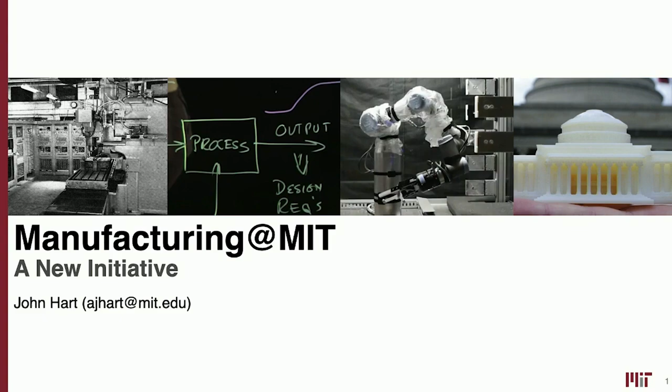I will describe to you the vision for a new initiative at MIT called Manufacturing at MIT, whose goal is to build new campus-wide programming related to advanced manufacturing, engage with industry, engage with faculty and students, and help chart a vision for a future of production that I feel is really unique and special to what MIT can offer. I have four main topics in my remarks.

The first is some context, my personal perspective on where manufacturing has been and where it is going. Second, something about the history of manufacturing at MIT and how we got to this date. Third, some details of our efforts to build manufacturing at MIT. And fourth, a brief summary of an industry consortium that we are just getting off the ground and welcoming a final set of inaugural members before we launch in the springtime of next year.

You're here because you have interest in manufacturing, and I'm here because I love how manufacturing drives so many aspects of our daily lives, from raw materials to the most sophisticated finished products. Wherever you are, you can look around the room and look at the clothes you're wearing and the devices you're holding and realize how many things have been in factories and how manufacturing matters to so many aspects of our world and the future of our world.

As you also likely know, manufacturing has shaped the course of history. There was a time, hundreds of years ago, when single innovations changed the quality of human life, such as Gutenberg's printing press in the 1400s, and the invention of the Bessemer Siemens process for open hearth manufacturing of steel, which was a key starter of the Industrial Revolution.

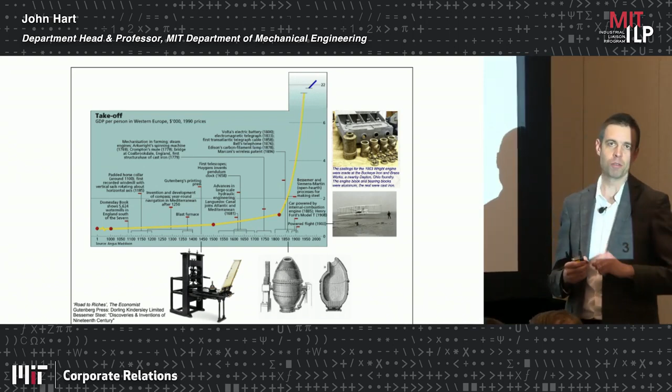Now, perhaps we're at a time when there's not going to be one such singular innovation that changes the future of production, but I also feel that there hasn't been a fundamental innovation in manufacturing in the past 100 years. Arguably, the most recent fundamental change was mass production, the Ford Motor Company's production system in around 1920, which led to the launch of the automotive industry.

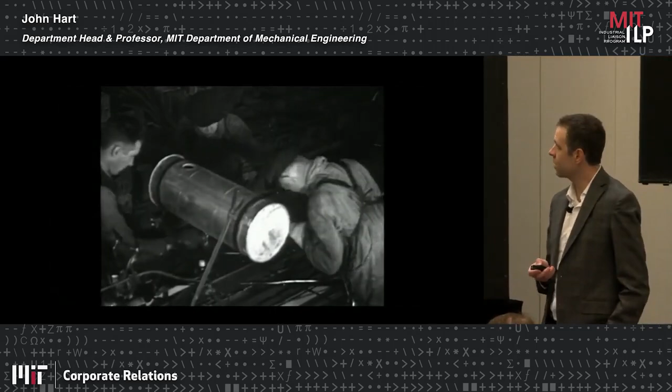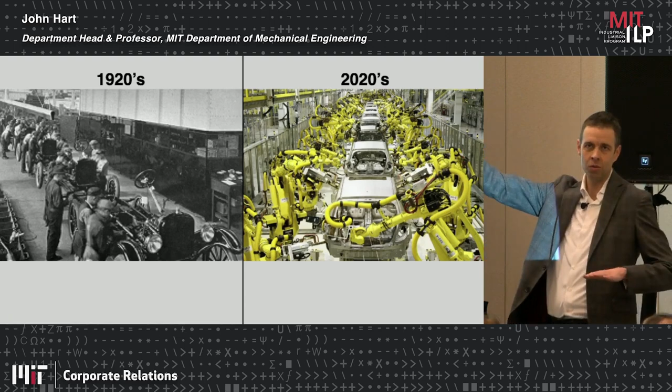If you look at some metrics, bear with my approximation here, between an automotive factory of the 1920s and a sophisticated production line now, you realize that while technology has advanced by orders of magnitude, and cars as a proxy for sophisticated systems are also much better and they're electrifying and changing, there's really been no change in the architecture of products and their connection to the complexity of the manufacturing process. Cars today versus 100 years ago have 10 times the number of parts, take 10 times the amount of time to come off the production line, and cost, on average, 10 times as much in adjusted dollars.

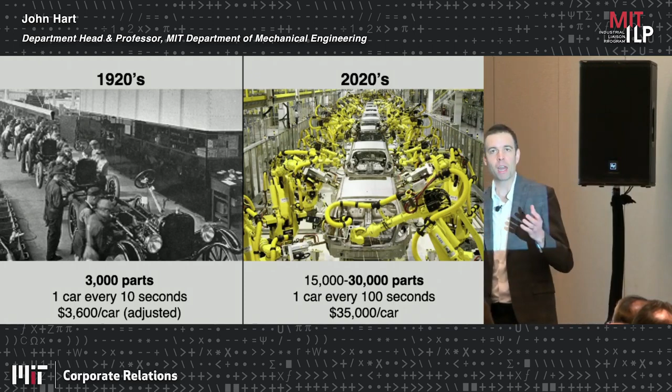So why hasn't this changed? Well, I feel it hasn't changed because there have been no technology advances that have inserted effectively on the system level into both production systems and to the front-end design of new products. And this crisis of complexity, as I call it, managing more sophisticated product designs, coordinating supply chains both nationally and globally, is reflected in many other products.

And as we hear a lot about these days, the future of manufacturing is also coupled with the world's greatest challenges, addressing economic inequality, combating climate change, and with an important attention toward national security. And...

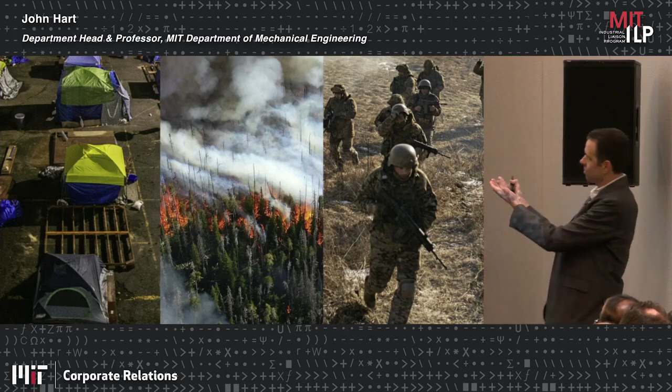This is a bit of a slide of despair, right? Concern. But I'm really here because I feel there's a lot of hope and there's a lot of opportunity. That the time to rethink manufacturing and reinvest our intellectual and personal capital in a new definition of manufacturing is now.

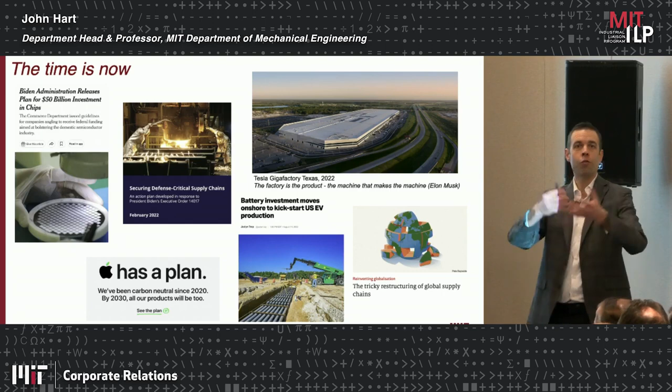I know you're from companies around the world, and this slide has a sort of more US focus, but I believe these trends are quite universal. You have governments around the world making new and big investments in advanced manufacturing, and you have the interest of the public and the private sector, industry and the investment community, believing in the importance of manufacturing for the reasons I described and more.

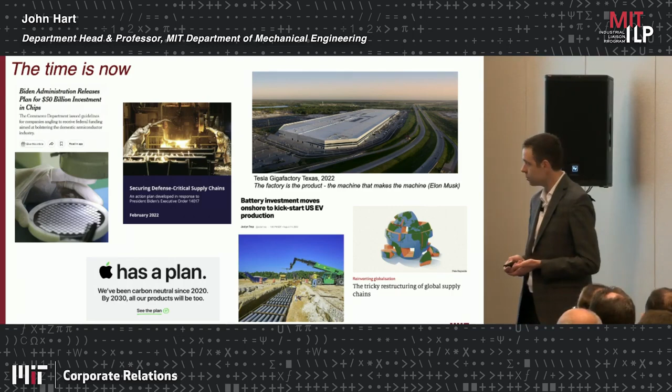For the past couple of years, I've been leading an effort with colleagues to look at the history of manufacturing across MIT and chart a course for the future. An interesting tidbit connected to the ILP is that the launch of formal, organized manufacturing research and industry engagement at MIT was about 40 years ago. The inaugural symposium of the Laboratory for Manufacturing and Productivity, which I direct, happened in 1978, co-hosted at Kresge Auditorium with the good old ILP.

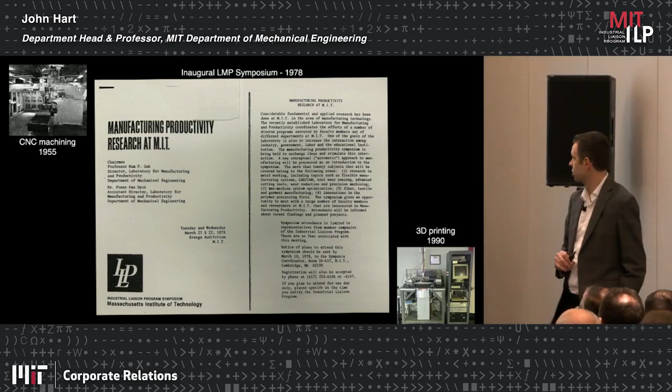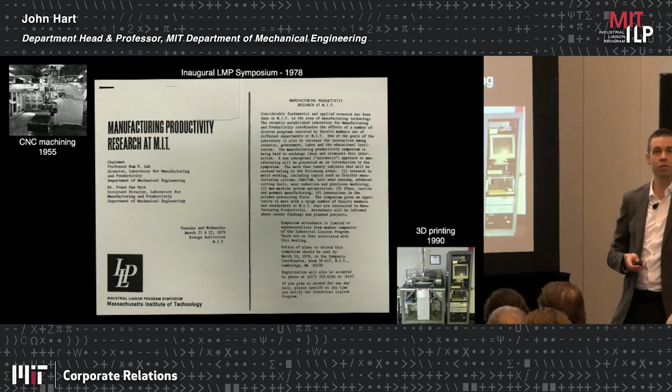You may also know that at MIT we built some of the first CNC machines that transformed aerospace and defense production, and we had some of the world's first 3D printers built by Professor Ely Sachs and colleagues. But what I didn't realize when I came to MIT as faculty 10 years ago is that alongside the technology arc, there's also been an amazing arc of research in not only production systems, but the social sciences and the organizational structures that drive and transform manufacturing globally.

These include seminal studies like Made in America, The Machine That Changed the World, that unveiled the principle of lean production, and more recently, the Production in the Innovation Economy and the Work of the Future studies.

So one takeaway of why I feel MIT can play a big part in this new manufacturing is our symbiosis between the technology and the social sciences and how that leads to change outside of campus and in the real world. I believe one measure of this, in addition to the many exciting technology areas—robotics, materials, AI, you name it—are the new companies that have been founded in the Boston area and worldwide by MIT alums with interest in manufacturing.

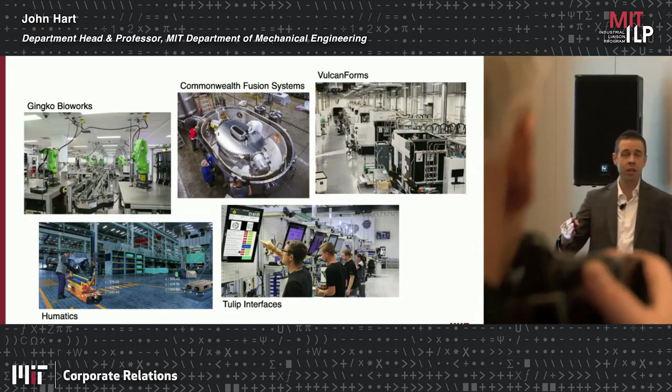These include companies doing biomanufacturing, accelerating the process to develop new pharmaceuticals and bio-derived products, factory-scale additive and digital manufacturing technologies, fusion and other clean energy technologies, and the factory floor and supervisory level tools that are needed to make supply chains and factories more digital, more automated.

And we have a really special connection between this interest in entrepreneurship, our ways of engaging with industry, and what our faculty and students do best, which is learn and do in the classroom and in the lab.

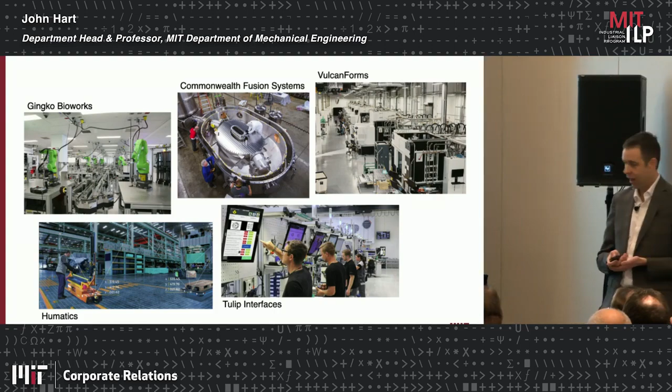So manufacturing at MIT is a vision for a campus-wide effort to establish new programs and partnerships that will help shape the future of production for innovation, growth, equity, and sustainability.

Over this past two years, we've been looking at where manufacturing is at MIT now and how we can start to build a stronger community that really exposes manufacturing as a fabric across technical, social, and management science disciplines. So here I'll tell you about a few things that we are doing, and then I'll talk about the future, where we're headed, and how we hope to engage some of you and your organizations along the way with us.

So first, we've started a series of very high-profile events, a distinguished speaker series hosting CEOs and government leaders from around the world, and we've also held an annual symposium every springtime that brings together folks at MIT with external partners and industry collaborators to talk about the future of manufacturing, from policy to technology to sustainability.

Second, we've taken a look at our curriculum in manufacturing and realized that we have a broad group of faculty across departments, including in my own department, mechanical engineering, that are teaching advanced manufacturing in a way that really reflects MIT's ethos, the combination of mind and hand.

For instance, in our largest manufacturing class in mechanical engineering, we flipped the classroom. We created video lecture materials that the students watch ahead of time, and then in class, instead of watching a professor like myself point at the slides, the students do a hands-on activity and ask questions to one another and with the teaching staff.

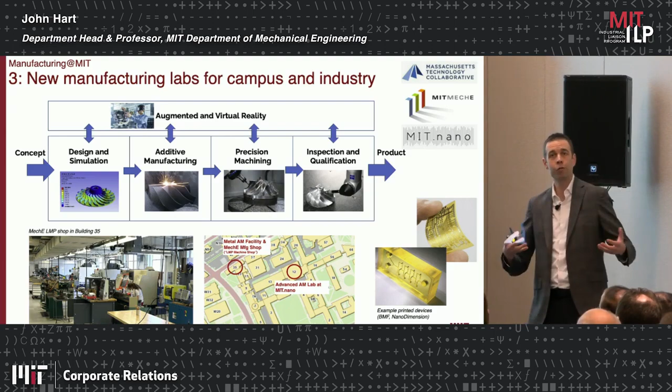And we hope there are more facilities as we build our programs in different and complementary domains in the future. And fourth,

Perhaps something that faculty are most excited about is a new large-scale research project to envision what we are calling this new manufacturing. It's a vague term, but we're laying out a series of questions: if we look at the technologies emerging in different domains—automation, AI, robotics, the ability to accelerate sustainability and new materials—along with different industry domains, how can technologies be deployed faster? How can policy and investment instruments be informed?

And what will the structure of firms look like in the future? Will there be more vertically integrated companies? Will there be fewer large companies and more small and medium businesses? And how will the overall connectivity change going forward?

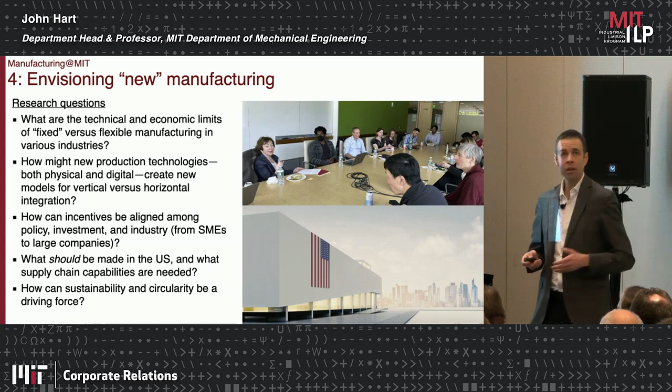And we have a global focus and want to work around the world, but we also have a particular focus on the United States in this project as a kind of laboratory for thinking about how this new manufacturing can emerge. And we think about the world's most famous manufacturing companies of the past 50 and 100 years, such as TSMC, which arguably dominates semiconductor production globally and introduced the foundry model to semiconductor production.

And we want to work closely with these companies and understand strategy, and understand how the things we do best at MIT relate, and also understand the beautiful small and medium enterprises that represent this special sauce that makes manufacturing excel.

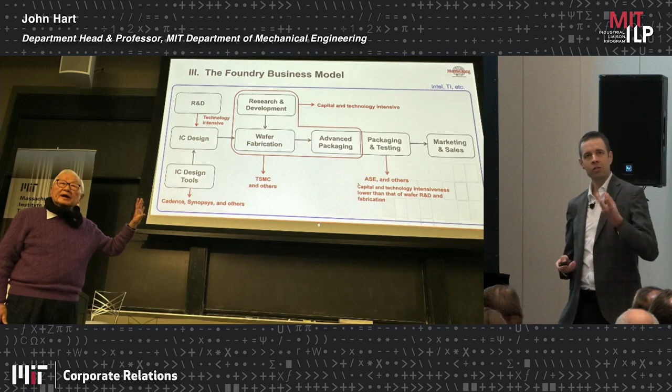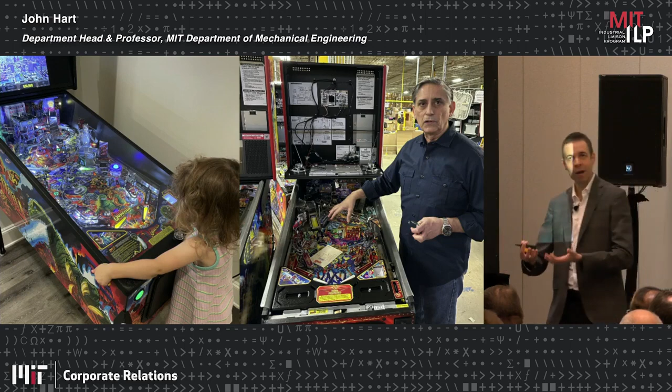They have 600 employees, and they do the full stack from design and licensing all the way to shipping sophisticated electromechanical products. And how do we encode the DNA of advanced design and manufacturing like this? And how do we reflect that on how we work with industry and how we do research that can lead to new technologies and more efficient production systems going forward?

And there's also many, many startups, such as VulcanForms, which is building the world's largest additive manufacturing production facility just an hour west from here in Devens, Massachusetts.

So putting all of these pieces together, what is manufacturing at MIT? I said it is a campus-wide effort to establish new partnerships and programs in these areas. And here's a perhaps too busy diagram of what it looks like to us at present.

So consider a new initiative at MIT that stitches together manufacturing from across campus, works closely with the existing departments, labs, and centers that excel in the technical areas—aviation and space manufacturing, semiconductors, rethinking the built environment, bio and chemical manufacturing, and you name it.

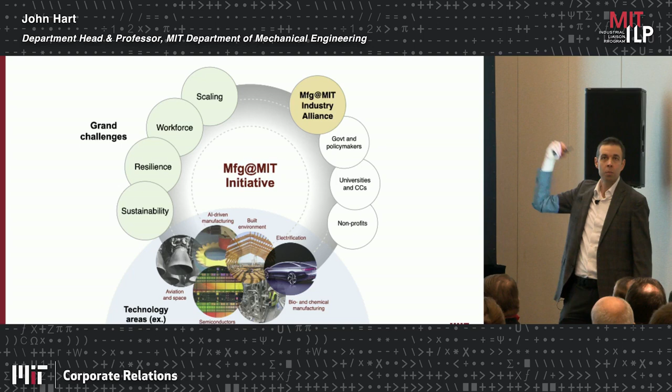It lays out a series of grand challenges, just overarching themes that touch all technical domains arguably, such as scaling new technologies and companies, building a stronger workforce, enhancing the resilience of our supply chains, and becoming more sustainable and circular in manufacturing.

And then it builds strong partnerships with industry through an industry alliance that I will describe, but also with government and policymakers, with other universities and community colleges and vocational schools that play a really important role in rebuilding our manufacturing workforce. And I mean those kinds of organizations, not just in the US, but also in other economies and emerging manufacturing economies.

And the initiative will set up these programs and affiliations and build new activities, seed early stage research through the alliance that I will describe, help work with companies to define collaborative technology roadmaps, hold events and workshops both broad and specific, catalyze entrepreneurship, introduce small companies to large, develop new educational programs for on campus and for the world, and build and operate new laboratories that our students and researchers will use, and that will also be available to industry to get access to advanced equipment and build prototypes.

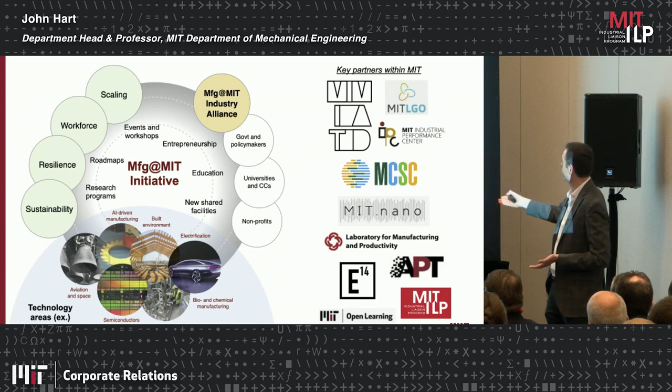And we will have many partners across MIT. As ILP members, you're familiar with MIT as this hodgepodge of logos and acronyms, and it's not that manufacturing sits in a silo. We work with the Morningside Academy of Design, with the Climate and Sustainability Consortium, and with venture capital firms and other degree programs around campus.

So now let me tell you, as I wrap up and hopefully have time for questions, about our industry alliance. And first of all, I'm not here to give you a sales pitch, I just want to tell you what we're doing. We really appreciate that you're members of ILP, and should you be really interested in manufacturing, we hope this is an opportunity for further conversation to understand your needs and your interest.

The Manufacturing Industry Alliance, or Industry Consortium, will be a platform whereby we engage with leading global manufacturing companies and allow our members to engage with one another through advanced research, education and training, collaborative strategy, and through seeding and adopting technology via entrepreneurship.

Here's a somewhat busy diagram of what engagement and membership in the Alliance will look like. We're in the process of recruiting founding members and plan to launch with a public event aligned with our annual symposium in April 2024, and we'll have different work streams.

First, you'll have a one-on-one engagement with us in manufacturing in the areas of strongest interest to your company. This will include collaboration with a Master of Engineering program based in mechanical engineering, where each member will sponsor one team-based thesis project a year and host students on site, plus the opportunity to co-develop training programs that suit your manufacturing workforce or professional audience.

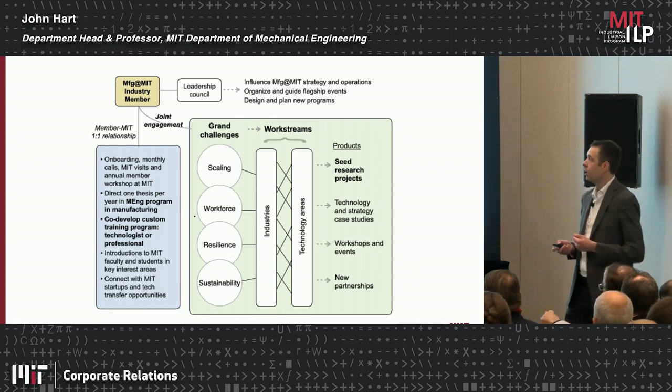For a little more detail on these three, like some other organizations at MIT, we will launch new seed research programs directed by members and on topics supported by our members. These will be IP-bearing in a non-exclusive, royalty-free fashion. These pictures aren't representative of specific projects from the Alliance yet, since we're just getting started, but are representative of the topic areas that can be represented.

Advanced materials for future manufacturing, robotics and automation, AI - as Faez will speak about in a minute - scale up of new chemical processes, sustainable processes, and beyond the lab, studying technology adoption. For instance, what is the pathway by which firms from small to large implement automated production systems? What are the key drivers? What are the key inhibitors? So each member will have a role in supporting a seed research project as part of the portfolio of member activities.

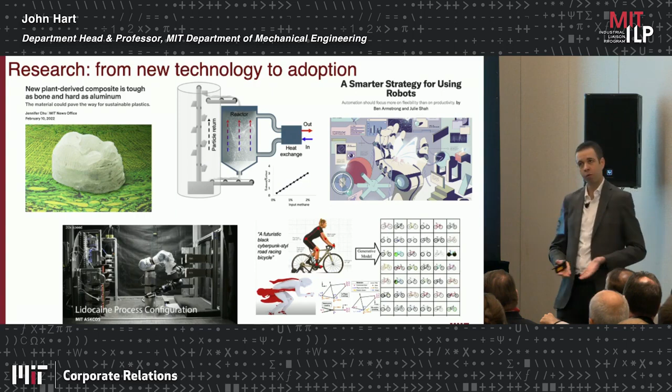Second, I mentioned engagement with thesis projects - you'll have the opportunity to support a student team project in our Master of Engineering program in Advanced Manufacturing and Design. This existing program, which we're putting together with our Industry Alliance, has educated hundreds of students over the past 15 years, many of whom are leaders of large, 'new manufacturing' companies. It's a 12 to 18-month program.

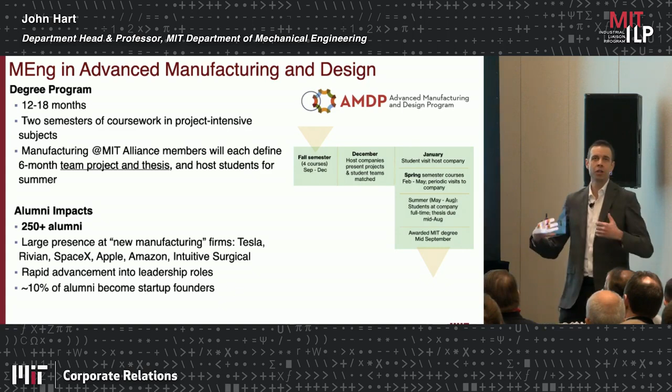On the 12-month track, students take courses in the fall and spring, and starting in December and January they ramp into industry engagement. As a team, typically of 3 students, they go to the project sponsor company in the summer, work on site, and then complete their thesis project together on a subject defined in collaboration with the company.

Last but not least, in the area of workforce training, you'll hear from Dr. John Liu at the end of the session. He's developing a program we call the Technologist Training Program, defining a new category of advanced manufacturing worker between the technician and the engineer - someone trained both specifically in their domain of interest and generally in the overarching skills needed to adopt and work in advanced manufacturing.

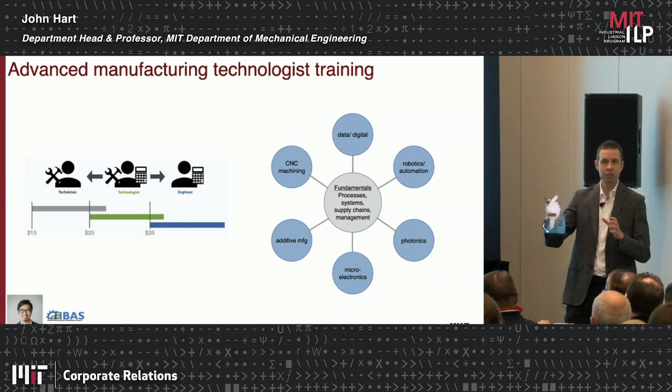This may not be exactly for you, or it may be a very specific area of interest where you need to upskill and attract new workers. We're excited to pursue partnerships between our member companies and local educational institutions near their manufacturing facilities, and to provide digital learning materials available online for free to facilitate more efficient, scalable workforce and technologist training.

Going back to the overall chart, I hope this gives you a little bit of the complete picture. Last, I'll mention that we'll have a leadership council where each member joins us in getting the organization off the ground and shaping the strategy.

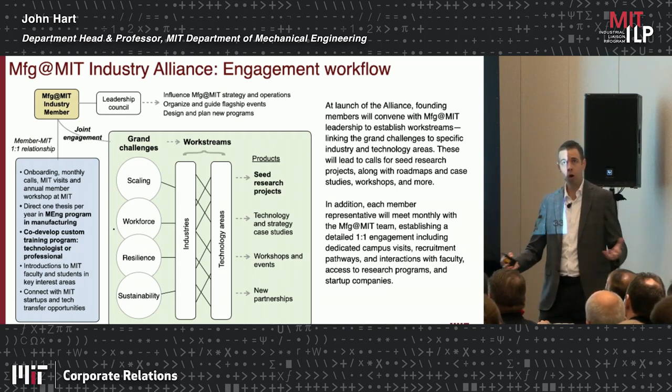And it's really important that our founding members, our inaugural members, have a lasting seat at the table to help us shape this for the betterment of all. We plan to launch in April. We like to keep track of things and manage the project. We're in the process of recruiting founding industry partners, and we will have an annual symposium along with the launch in April. Whether or not this interests you, ILP is always a tremendous partner, and we'll surely distribute the invitation to our annual symposium. If you're around or able to fly into Boston, we hope to see you there.